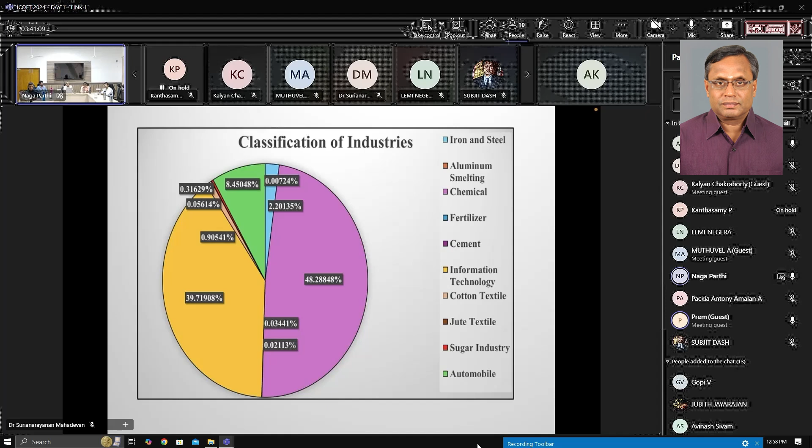The second worry is Indian industries are about 60 to 70 years old, with no opportunity for upgradation of their process. Neither have they recruited people with high intelligence from national institutes such as NITs or IITs - very few such people are seen in Indian industries. Maybe a couple in Reliance, or 4 or 5 in Adani's and other industries. But in major part of our industries, the intelligence has not gone there. Therefore, the upgradation or technological advancement in these industries has been a big challenge. This itself is, as our Prime Minister says, Atmanirbhar, and also Made in India. These are some of the key challenges and key opportunities - opportunities that exist for all faculties, young faculties or senior faculties who are guiding research students, for everybody.

So that is why today I'm here to talk to you on the safety aspects. First of all, when we talk about safety, we should delineate between personal safety and process safety. Personal safety is something which is individual - when he is on the shop floor, how he gets exposed or affected due to workplace injury or ill health. When we talk about process safety, it is safety for everybody within the factory, outside the factory, and in the village or city that is surrounded by the factory.

For instance, the worst case of an accident that India bears is the Bhopal gas tragedy, which struck in 1984. Of course very few plant personnel got affected, but those people who got affected were all outside the plant, within the 10 kilometers area in all four directions. Even the rail, which stopped for a few minutes at the Bhopal station at that time, everyone got exposed to the chemical. So process safety is something which is very huge and can affect a large number of people at the same time within a fraction of a second.

If you are not prepared to address process safety in the process industry, there is no meaning in running an industry. It's better to close down, because we don't aim to run industries to kill people. We aim to process our materials successfully, make huge profit, and contribute to the economy of our country. Industries are the backbone of our economy.

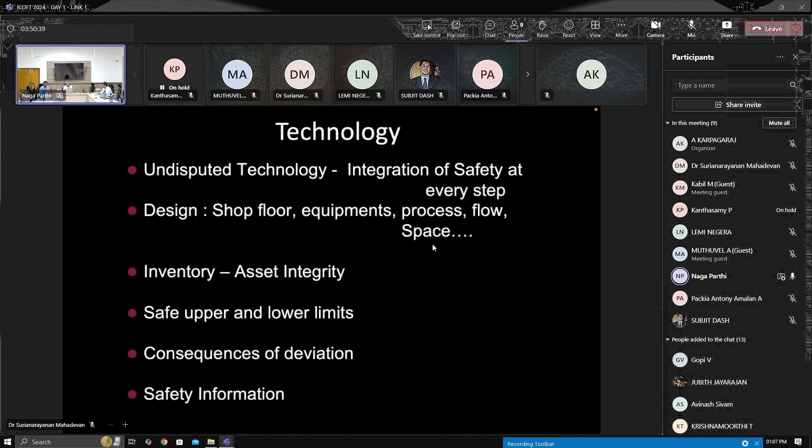Any loss of vapor is money, right? So that vapor could be a fuel now. So that is one thing. Asset integrity is not very good, and technologies are changing now.

Now people want to move away from fossil fuels to biohydrogen, or they want to use electricity for running vehicles. So these are some of the technologies which have not yet reached us, and some of our bad neighbors are very good in doing all that. It is because we have not contributed from the academic side to all these technologies.

What are safe upper and lower limits? How can we increase our inventory? How can we lower it down? For instance, when Corona was there, all our industries were shut down. Should we do like that, in an emergency like that? This has caused huge loss, not only for the industries, but also for the government.

For almost 2 years, no industries were given permission. Should we do like that? Even though it was a government policy, because we never had an automated system of operation, all manual interventions had to be done, and the people had to be kept away from the pandemic. So our industries were closed down, which is very, very bad.

So do we have a technology to meet another pandemic like this? These are all questions that we need to develop. Certainly think about it and then get prepared. All the faculties, all the students - these are the areas that should be your future project work. That should be the PhD dissertation, that should be your masters or other thesis presentations.

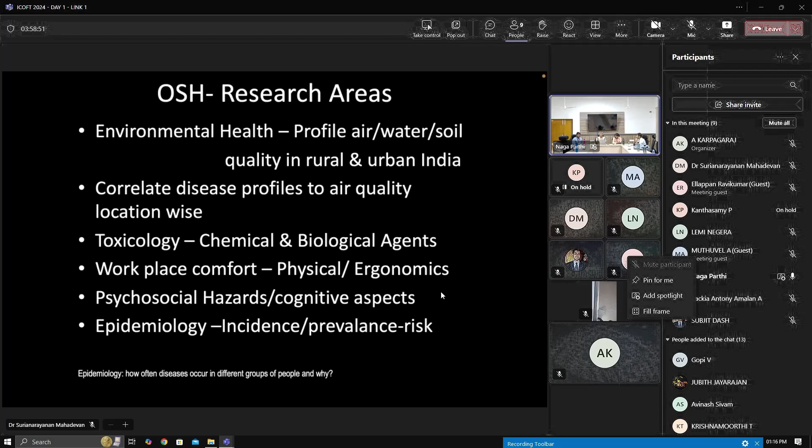So you can start a project - think of doing a project in some 10 villages around the National Institute of Technology, Puducherry. You can write a proposal to profile the disease around NIT Puducherry and come out with a model that can prevent this from happening. This is a fantastic work area people should definitely concentrate on.

Toxicology, chemical and biological agents - yesterday I was listening to news about one country in Africa where China is doing a lot of gold mining. Some people there had to drink water contaminated from the gold mining, and about 40-50 people died from that. How can this happen?

Due to chemical industries pollution, and biological agents similarly. Biological agents are so bad, and they develop in different locations depending on the type of effluents that we let out. Can we profile them? Can we come up with an antidote for all these things? If somebody is getting affected due to chemical poisoning, they go to a local doctor or a government hospital, for instance. Do we have an antidote? This is a big question now.

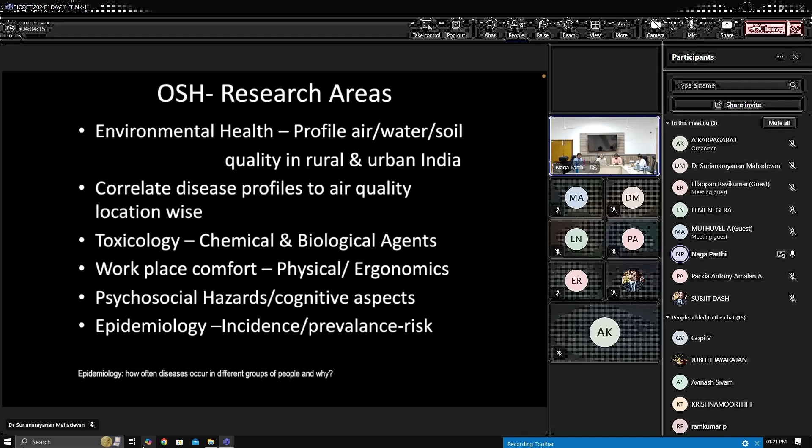Epidemiology is like, for instance, what happened with Corona - prevalence of risk. So those kinds of studies, although a lot of medical colleges are concentrating on epidemiology, are based only on clinical approaches. Biomarkers for a lot of these diseases are not available, and identifying a biomarker itself is a very huge task. Unless engineers associate with doctors, I think it's not possible, because engineers have a different kind of brain, as I believe, and we can definitely concentrate on this.

Then coming to the next aspect, the risk assessment method. Risk assessment is a very common terminology applied to all types of industries, and here you find that people use it in different ways. For example, if you go to the Port Trust of India, or to our aerospace industry, or to our space industry, people have different classification methodologies for risk assessment.

So that brings an ambiguity on the true assessment of risk. So can we unify all of them? Can we work on it?

This is a typical problem in our country, because it started pre-independence and is still continuing, where we think we need somebody else's brain. We have our own brain and we can definitely work on it. We must apply excellent technologies like artificial intelligence or CFD, computational fluid dynamics. I met someone who is an expert in fluid dynamics here, and we can use all that to model these systems.

When you do model, I see a lot of papers in the morning on modeling of this and that, but do they reach the industry? If you just model it, publish it, present it at a conference, get your degree and go out, it's of no use unless you put it in practice. Like safety engineers, we always believe in what is happening in the shop floor, in the industry. Unless you do this, it's not going to help the country in any way. We graduate, we go, we make our bread and butter, but ultimately the industry is not improving.

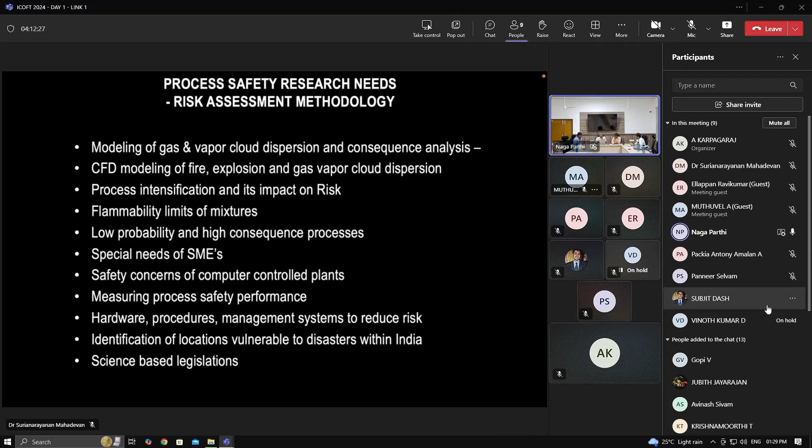Reliability engineering - this is something that I really wanted to talk to you about. There are so many process equipments in the process plants. Do you know how many years these process plants and process equipments are valid for? Is it the one that the manufacturer specified?

Even sometimes you find that a pump in an industry can work for more than what the manufacturer specified. A particular company's pump, and another particular company's pump of the same capacity and rating, will not work for even the manufacturer-specified time. So how do we address this? Because most of the process control failures are failures of equipment, and this failure is related to reliability. How do we generate the data? A particular company manufactures a sensor or pump or other process equipment - how do we depend on its reliability, and how do we improve the performance of that machine?

Unless you have a feedback mechanism - this year you bought something and then you say this is not good, so I'm investing in another thing - the investment can also be stopped, which is siphoning from your profit. So anything related to sensors, interlocks, equipment, reactors, whether it's nuclear or aerospace or any sort of industry, there is an excellent opportunity for people to get themselves involved.

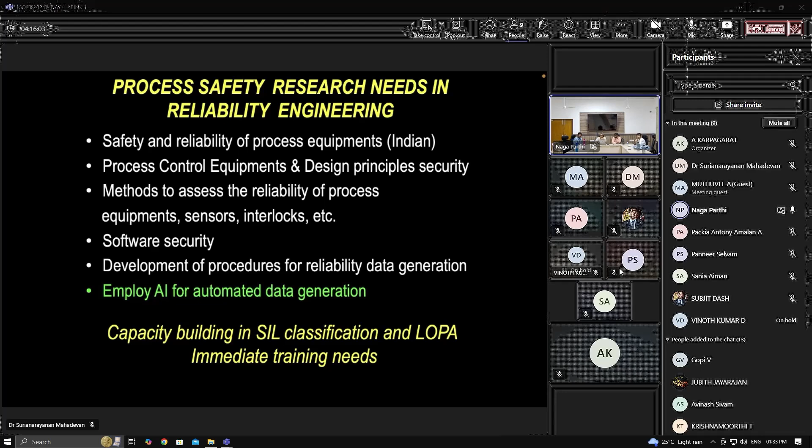Yes, this is one of the security issues I talked about. Today, due diligence says that our process industries are a soft target for terrorist attacks. Just imagine if somebody comes with one truck of RDX and attacks the library building where we are sitting today, terrorist attacks here. What will happen to all of us? This is the sort of thinking that is there in the terrorist mind.

What are we engineers sitting here doing for this? Is it only the IT industry which is responsible for it? No, all of us are responsible. How do we do that? We have to prioritize our research areas, and these research areas should be based on safety. Safety is welfare of all of us, and safety is welfare for our country.

These things are being practiced. In China during the Corona time, face recognition was there, all of you must be knowing, and they spotted people so that they don't allow the pandemic to spread. Based on that kind of foresight they developed the technology. Maybe they thought that it would help so they could avoid spreading it to other people.

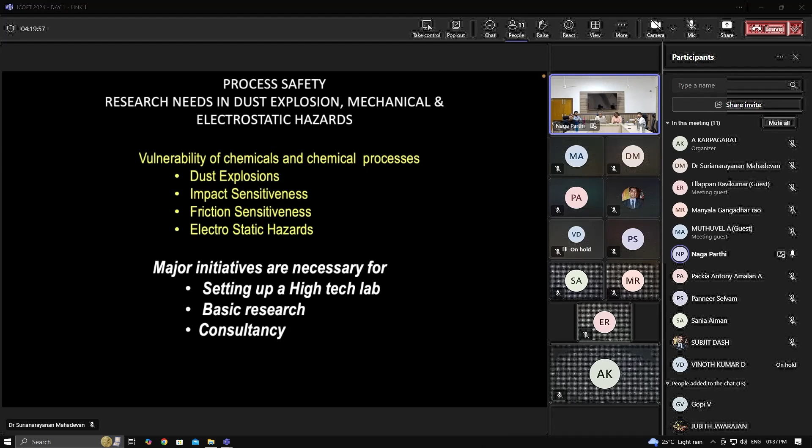And of course, I skipped this, I'll skip this also. This is the next thing - we have always learned from the past, anywhere, even in our life we have learned from the past. We lost something, how did we lose something? We think about it so that we are careful next time and don't lose it.

But Indian industries are facing so much accidents. We never analyze the accidents. We never understand the consequences of the accidents. What are the causes of the accidents?

We need to strengthen the process industry so the same kind of accidents do not occur. This is an effort that has to happen in Indian industry. I've been telling the government wherever possible that we need to start a safety research institute, whether under CSIR, ICMR, or any other body. This has not happened at all in our country. Some of you senior people should take this up, talk to the government, and set up one.

For instance, the mechanical engineering department here in Puducherry could be a center for excellence in safety research. Once you have a center for excellence, you can convert it into a safety research institute at NIT Puducherry. The possibilities are there, and young faculty, you are all here. You can definitely think of it. This is feasible, and all of you can think about it.

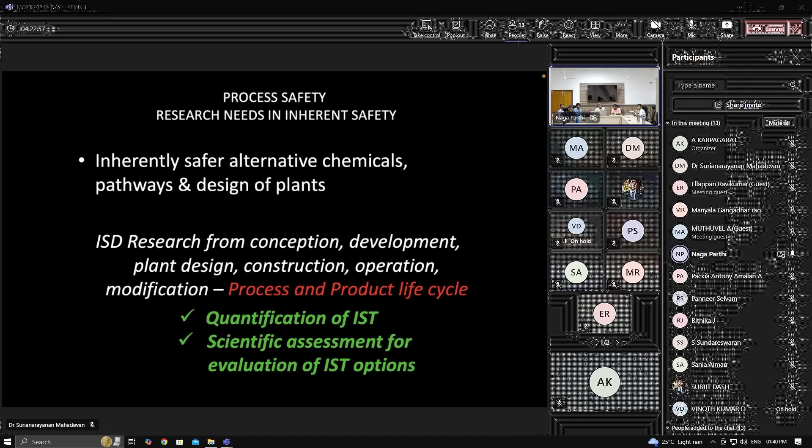And nanotechnology, we were talking about it, I don't know where it has gone. NIT Puducherry, are you all working on nanotechnology? These nanomaterials have had a remarkable effect in the process industry, but what is the safety of these nanomaterials? Can they enter the respiratory tract of human beings? Some research and projects need to be initiated, because in high-end process industries like semiconductor chip manufacturing, a lot of nanomaterials are used for engraving, and people can get exposed to this.

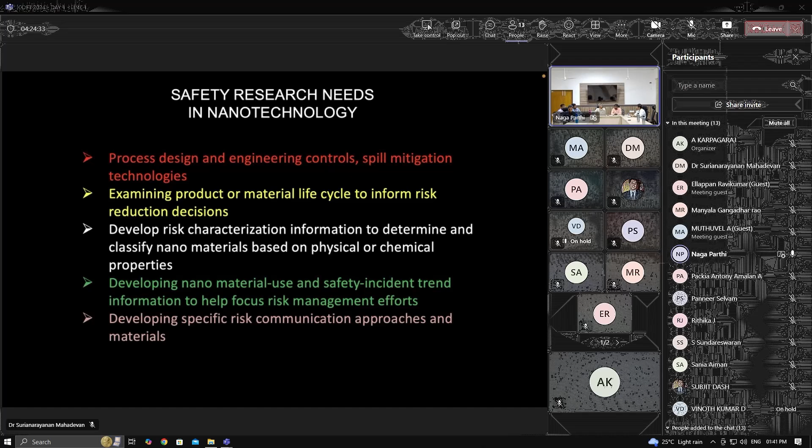This is an era of semiconductors, with huge competition going on across the world. China wanted to capture Taiwan because Taiwan is the world's semiconductor industry now. We need to rise to this level. Can we become a developed nation simply based on agriculture? No. Unless you concentrate on electronics, you will never become a developed nation. Once our electronics and semiconductors are strong, our defense applications will improve, including supersonic missiles, which North Korea is able to make and we are not. There are so many things we need to work on.

The safety research forums should all join together, looking abroad, even to Korea. South Korea is in doldrums today due to political instability, but in other nations, safety research forums bring together academics, research scientists, and industry experts. They conduct many meaningful workshops and exhibitions displaying safety products. Who will organize this, the industry or academic institutions? Who is going to bell the cat? This is something we need to keep in mind. Can an organization like NIT take the lead role and address these things?

Process safety information is something people are interested in for products, process yield, and all that, but not worried about their own product safety. If they distribute it in the market and something happens, there are so many warehouses and godowns which go on fire, and all these materials burn. But when you gave your product out, did you also warn them that if they don't store it adequately, it may go on fire? These kinds of information are not available across the process industry. We can get hold of major industries, talk to them, and get industry-sponsored projects to help develop this education and training.

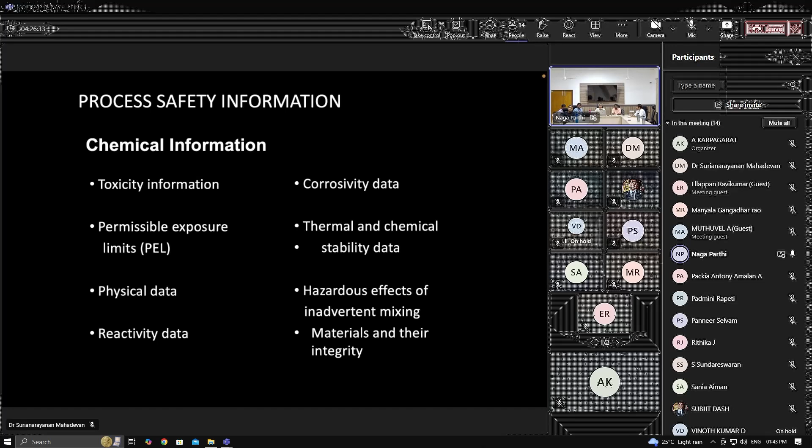Now so many institutes have come out with the MTech in industrial safety. I have no comments on this, but we definitely need excellent and committed faculty who can nurture good safety scientists for our country.

Industry support services - somebody should also help the industry. Some faculties can join together and do a risk assessment of safety for a micro and small scale industry. Make small profits for your department which you can use for larger projects. Safety audits - industry requirements are huge now.

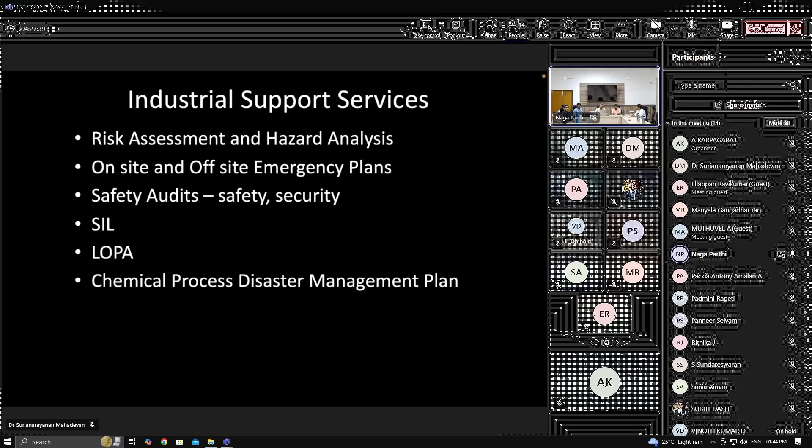Organizations like NIT or IITs can go and tell the director of industrial safety that we will help the industry and assess their safety. They would be very happy. You have innovative thoughts and ideas. Being academic institutions, I think we should come forward and do that.

And then manpower - let me talk about this once more. At least we need 50 faculties from different disciplines to accomplish whatever I have said. We also need a lot of technical staff, project assistants, and 50 research fellows to work on every basic research area in every institution.

I think India will certainly become - somebody has to think about it. This broader thinking has not come, so that is why I'm putting this today. A broader sort of thinking is necessary so that everyone is benefited. I'm sure if you do this, your career will definitely be a very brightened career.

Artificial intelligence in the healthcare industry - today for operation surgeries, somebody is required to do a surgery in the pancreas, for instance. How do you reach the pancreas, which is in a very difficult location? And if somebody wants to do a replacement of a lung...

Many research papers still concentrate only on algorithm-based robotic things. You can go for artificial intelligence models - look at what data is available in the literature, train an AI model, and then apply it along with the robotic or other algorithms, integrate them and benefit a lot. These are all required for increased diagnostic accuracy, treatment planning, and forecasting outcomes.

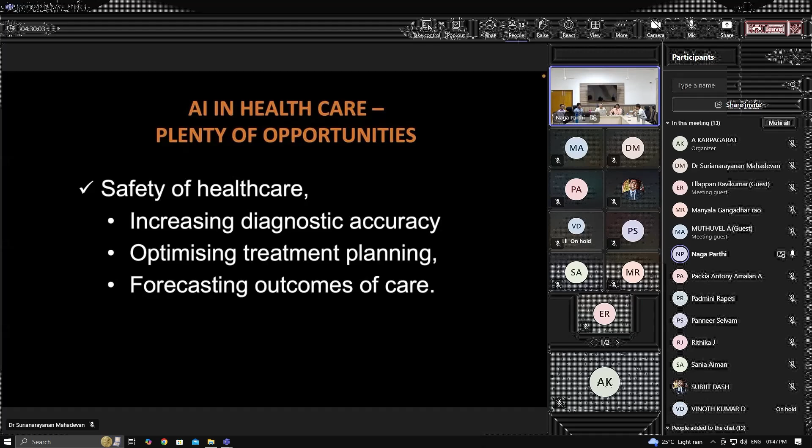I'm so happy to tell you that only engineers can do this. Doctors can only treat - when you give directions, they can treat. If you don't give directions and work only in your own area, healthcare in our country will not improve. Go to any developed nation and look at who, other than doctors, are working in the medical area. Healthcare is most important.

So to summarize, engineering disciplines - chemical engineers can work on process selection, operating conditions, safe operating envelope, process design, process control, safeguards, and monitoring. Civil-based work includes site layout, elevated structures, grading, drainage, buildings, facility siting, and infrastructure. Mechanical engineers can work on pressure envelope design, rotating equipment, codes, and monitoring.

If somebody is from electrical - I'm reading it out so everyone can hear clearly - reliable power, arc flash protection, area classification, grounding, bonding, and so many areas. These people can work on medicine, aerospace, automobiles, instrumentation, computers, and so on. Safety requires every discipline, and every discipline requires safety.

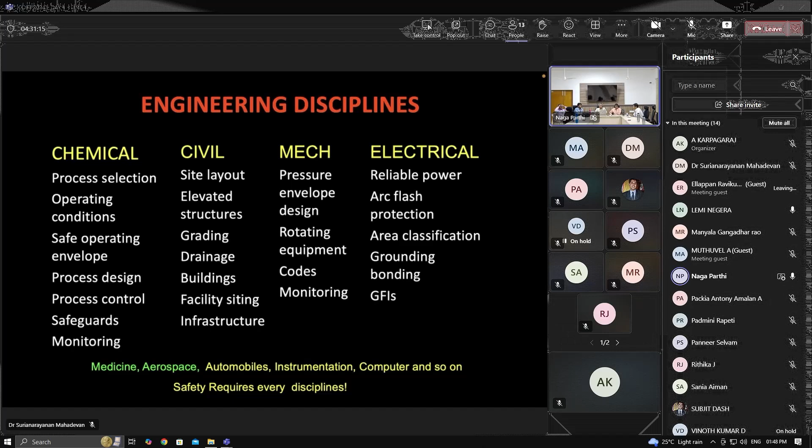Nobody can say that I don't need a safety engineer and can work independently. It is not possible - I challenge anyone on this. And finally, the accreditation - when we develop these technologies, we should publish them as academics, also write a lot of patents, and apply them.

Apply for accreditation - these accreditations help. Foreign players can recognize you and help you start new industries in this country, and new academic courses can be started here. They will be more open, so you don't have to really prepare academic notes - whatever is available from those academic institutions by collaborating with them. I think that is possible and achievable.

And security, as I said, we have to have capacity building to assess the vulnerability of vital installations. Simple physical manpower security doesn't mean it covers cyber security or process control systems - those things are also required. Other nations are giving due diligence that India is vulnerable in this area, and we will have to quickly rise up to address this.

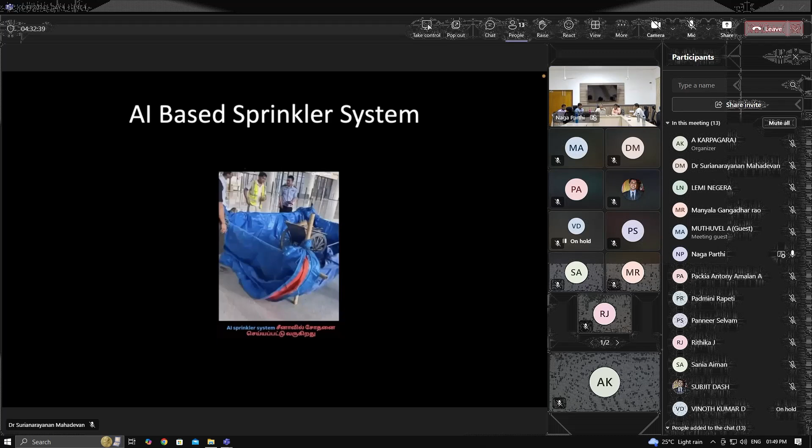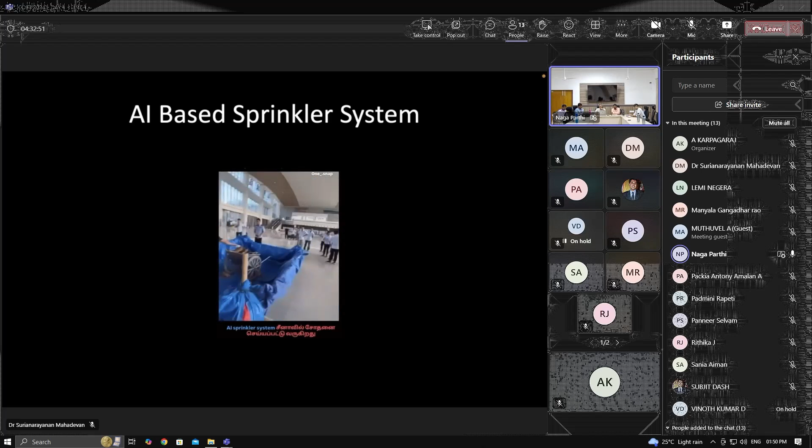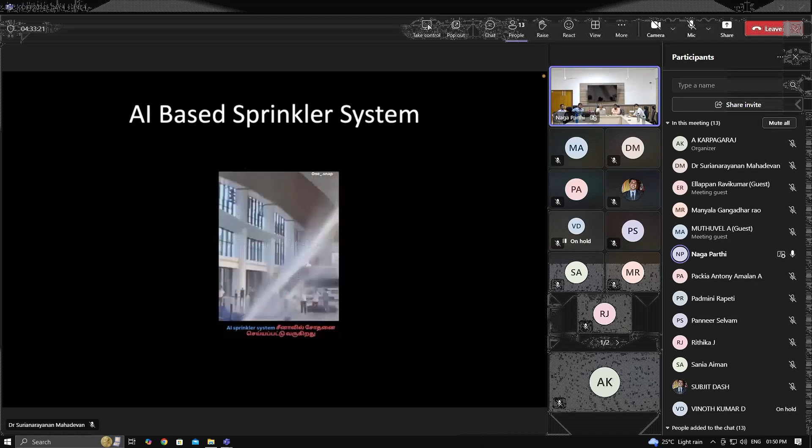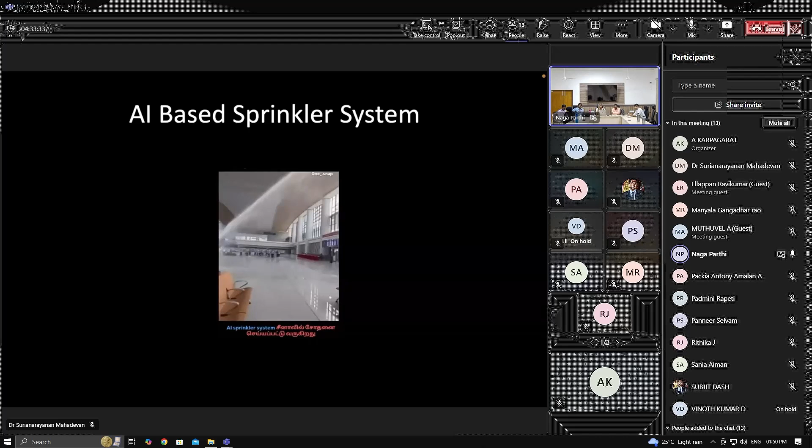This is one simple video which I... this is an artificial intelligence-based sprinkler system in an industry. Here is a big shop floor, and they're putting a fire. So it has recognized the heat in that particular area - that digital eye - and it's specifically dousing it. This is an artificial intelligence-based sprinkler system. This sort of process control system is required for our process industry.

I'll show you another example of what Sweden has done. They have put a charging lane - you don't need to really have charging stations where all your scooters and things could catch fire. Instead, they've made the road itself in such a way that it's very safe. So while you drive the car or a scooter, it gets charged. This is an artificial intelligence-based system.

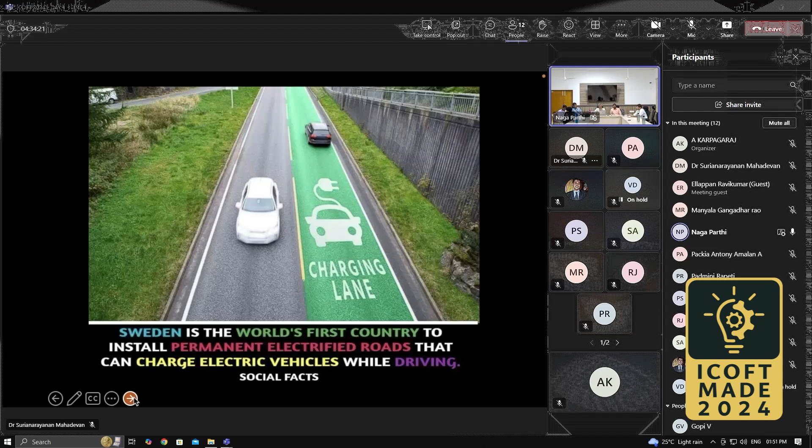So how do we develop such systems in our country when we are just beginning to use electric vehicles? When we are also planning huge highways we are building, can we start this, for instance, from Bangalore to Chennai? Can we do this? Do we have the technology? If you ask Sweden, they will ask you a lot of money. But can we really work in a self-dependent way and do this?